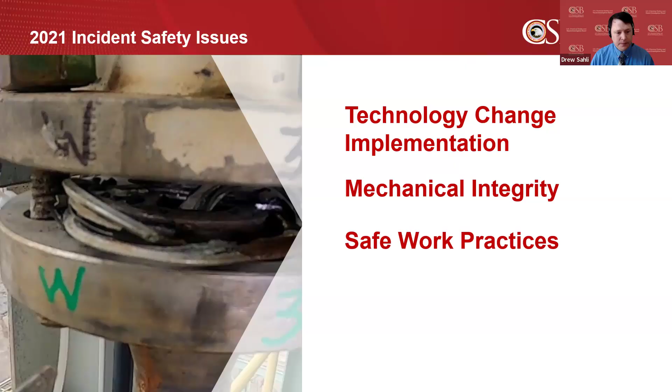The CSB identified 3 safety issues for this incident: technology change implementation, mechanical integrity, and safe work practices. The first issue is technology change implementation.

The 245 unit began operations in 2002. Within the first 5 years of the unit's operation, Honeywell documented corrosion failures to spiral wound gaskets in certain HF services within the unit. Honeywell identified a new gasket technology and conducted a management of change review. During the MOC process, Honeywell made the decision to replace the corroding gaskets by attrition. This was because the company believed that the existing gaskets were still acceptable for the service, despite the gaskets experiencing ongoing corrosion since the unit first began operating.

14 years later, in 2021, one of these spiral wound gaskets failed catastrophically and fatally injured a Honeywell operator.

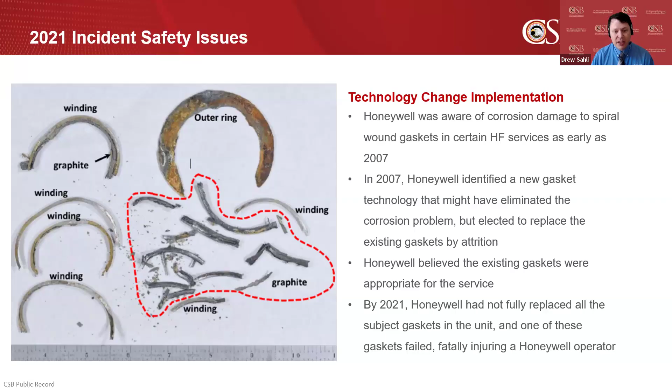The second issue is mechanical integrity. Honeywell had a mechanical integrity inspection program for the piping involved in the incident. And in the 36 days prior to the incident, Honeywell inspected the incident piping twice, once as part of this MI program and once as part of its leak detection and repair, or LDAR program. Neither inspection identified any problems with the incident piping.

Additionally, Honeywell did not use technologies that could have helped its inspectors and operators identify the leaking gasket prior to its catastrophic failure. These technologies include acid indicating paint and remote HF monitors. These technologies are either required or strongly suggested by industry guidance from the API and HF industry trade groups. Further, the use of these technologies is heavily recommended by Honeywell itself.

Honeywell operates a business unit in which it sells HF safety-related services and products. That business unit recommends to its customers to use acid indicating paint and HF monitoring. But despite Honeywell's own guidance to its customers, Honeywell was not using the technology in its own 245 unit.

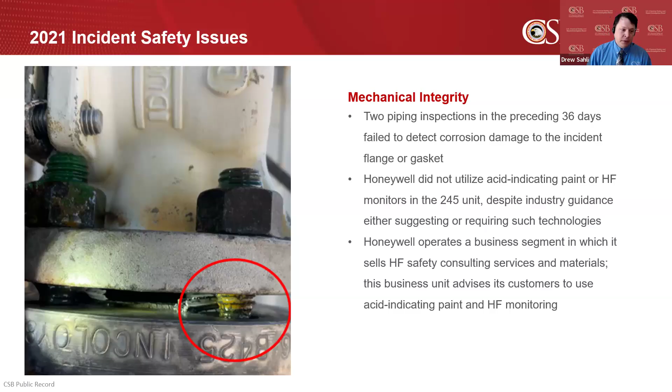The third safety issue for the 2021 incident is safe work practices. Honeywell attempted to start up equipment that was not ready for operation, and its startup attempt did not follow the company's written startup procedures. Because the startup procedures were not followed, the valve on the HF inlet to the vaporizer was left closed after a planned maintenance outage, but the valve was never reopened prior to the startup attempt. This caused the no-flow condition to the vaporizer, which in turn caused the presence of the two field operators in the vicinity of the leaking incident gasket.

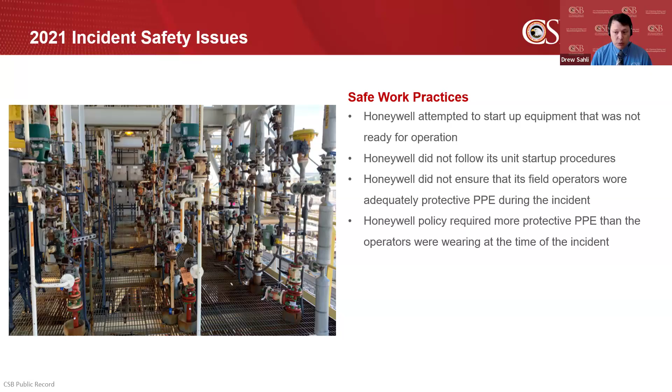Also, neither of the two field operators were wearing adequately protective PPE during the incident, resulting in one of the operators' fatal exposure to HF. Finally, during the emergency response, Honeywell's emergency response team wore PPE that was less protective than what was required by Honeywell emergency response procedures.

I'll now cover the second incident, the 2023 catastrophic reboiler explosion.

The second incident occurred on January 23, 2023. Honeywell was starting up the 245 unit after an unplanned outage. The startup proceeded normally until the reboiler suddenly and catastrophically exploded. The reboiler failed at normal operating conditions that were within the reboiler's as-designed temperature and pressure limits.

Over 800 pounds of anhydrous HF and over 1,600 pounds of chlorine were released during this incident, and the explosion met the definition of a BLEVE, or a boiling liquid expanding vapor explosion. Honeywell reported $4 million in property damage, and there were no injuries associated with the incident, very fortunately.

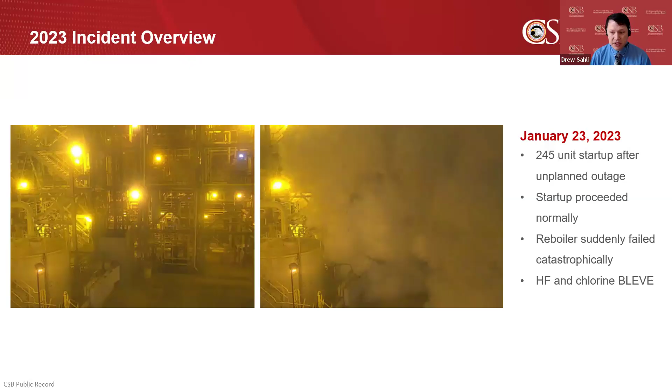The CSB identified 4 safety issues for this incident. Those are mechanical integrity, the management of organizational and personnel change, capital project management, and organizational resilience.

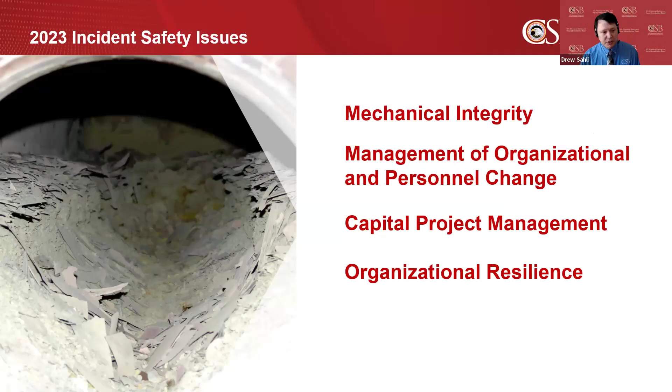First, I'll cover MI. Since the reboiler's original installation, Honeywell Geismar has run it to failure 4 times. The failures occurred in 2003, 2008, 2012, and 2023.

Honeywell had a pressure vessel inspection program and generally followed the guidance in API 510. Additionally, the reboiler's carbon steel shell corroded at rates that were consistent with published industry data, data which Honeywell was aware of. Despite this, Honeywell's mechanical integrity program was unable to prevent any of the 4 shell failures.

The incident shell was installed in 2012. Prior to the 2023 explosion, Honeywell last inspected the shell in October of 2021, about 15 months prior to the explosion. Honeywell detected that the shell was approaching its minimum thickness and initiated a capital project to replace the shell.

Management approved the project in February 2022, but the project was never completed, and Honeywell never purchased or installed a replacement shell prior to the explosion.

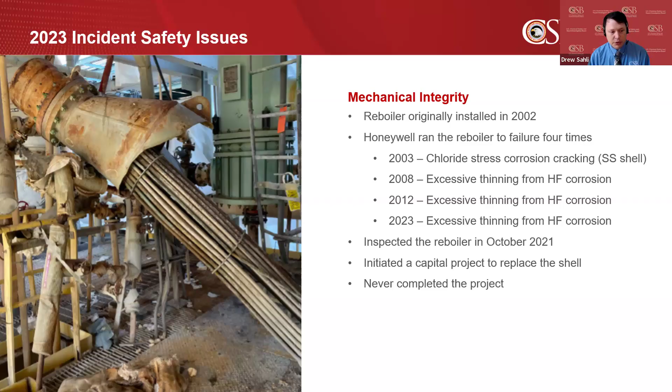The next safety issue is the management of organizational and personnel change. After the Geismar Site Reliability Organization inspected the reboiler in October 2021 and detected the shell thinning, the reliability team referred the reboiler to the 245 unit's maintenance engineer.

The maintenance engineer initiated a capital expenditure request or project in January 2022, and site management approved it in February 2022. Subsequently, in April of that year, the 245 unit maintenance engineer left the company for employment elsewhere.

The CSB determined during its investigation that this single engineer was the only employee at the Geismar site who had active current knowledge of the reboiler project when he departed the site.

Honeywell had an existing applicable management system for managing personnel change, but when the 245 unit maintenance engineer left the company, his manager never performed an MOOC analysis and never reassigned the reboiler project to another employee. As a result, the project went unmanaged and the reboiler ran to failure in January 2023.

Honeywell also did not apply its MOOC policy and procedure to several other significant changes at the site, including a large-scale reduction in force, ongoing vacancies to 2 key site management positions, and other personnel changes.

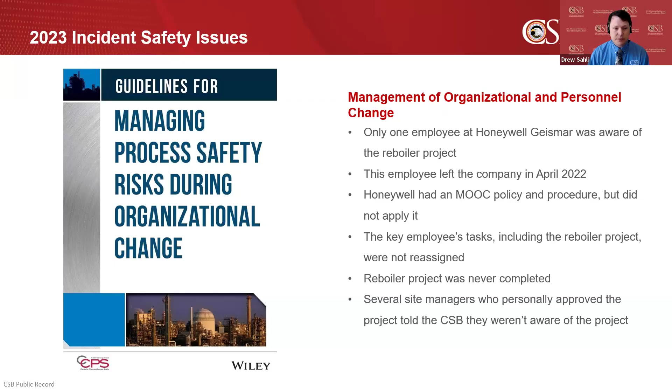The third safety issue for the second incident is Honeywell's management of capital projects. Honeywell had 2 primary ways that it handled capital projects. First, it prioritized projects according to their criticality and complexity.

Generally, less complex, less expensive projects, like the one to replace the reboiler shell, were supposed to be funded almost immediately after being approved by management. The reboiler project was approved by management in February of 22, but it ultimately never received funding.

From October 2021 to January of 2023, Honeywell approved 142 projects for capital funding. Of these 142, 78 were either unprioritized at all or were prioritized lower than the reboiler project. Despite this, Honeywell funded all 78 of these projects instead of the reboiler project.

As a result, the reboiler ultimately ran to failure. This indicates that Honeywell's capital project management system was operating outside of its procedural and policy requirements.

Finally, the last safety topic for the reboiler failure is organizational resilience. As a concept, organizational resilience is defined as an organization's ability to detect, cope, and adapt to changes and disruptions to normal operation. In October 2021, Honeywell Geismar experienced a fatality incident, which I described earlier.

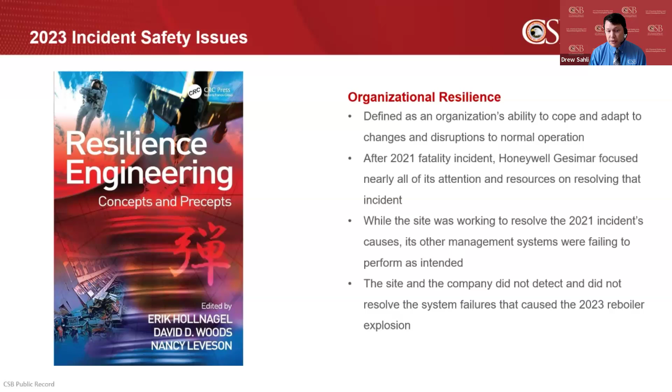That completes my review of the 2021 and 2023 incidents. Next, I'll pass the baton on to my teammate, Don Nixon. Thank you, Drew. I will talk about the third incident, common factors, and some recommendations. Next slide, please.

Leading up to the incident, the 245 unit was undergoing a planned maintenance outage. A few days before the incident, Honeywell prepared the D-reactor fresh feed station for maintenance, including locking out the piping segment.

On the morning of the incident, 2 Turner pipe fitters obtained permits from a Honeywell operator to conduct gasket change work. The 2 Turner workers and the Honeywell operator proceeded to the unit to review the job and conduct a line break.

The 2 Turner workers donned level B PPE, which included acid-resistant suits and supplied fresh air. The Honeywell operator wore level D PPE. At the Honeywell operator's direction, the Turner worker opened the fresh HF feed station piping in 4 locations to monitor the piping for any signs of residual HF.

The operator observed no HF and believed that the piping was sufficiently clear. He then closed out the line break permit, and the 2 Turner workers conducted the rest of the job under a safe work permit, which required only level D PPE.

As the 2 workers proceeded through the work, one of them loosened the blind flange on one of the 2 bleed valves. Neither the Turner workers nor the Honeywell operator were aware that the valve had not been cleared of HF prior to the work.

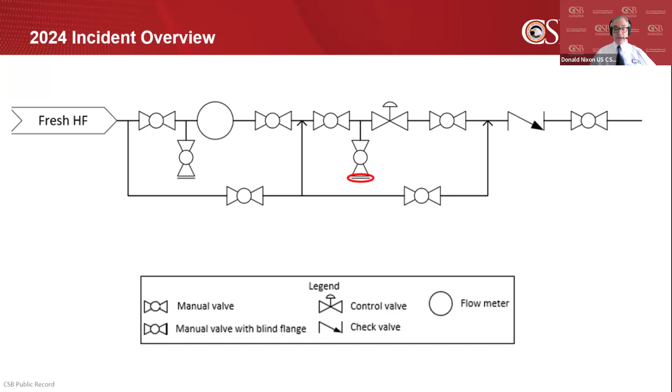The CSB identified one main safety issue: safe work practices. The blind flange connection from which the HF was released was not within the job scope. Yet, from a safety perspective, whether the flange was in or out of the job is not relevant, because the valve was within the bounds of the locked out piping and should have been cleared of hazardous energy.

Honeywell did not clear the valve during its preparation for maintenance. Further, immediately prior to and during the work, neither Honeywell nor the contract workers identified the hazard. Because the valve was in the closed position, there was no way for them to be sure that the valve had been cleared during maintenance preparation.

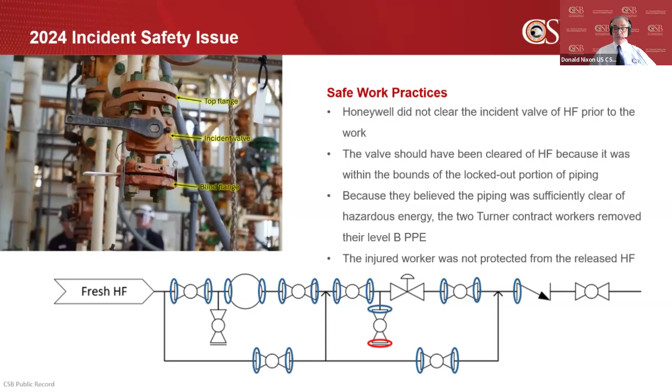After conducting initial line breaking activities in level B PPE, Honeywell and Turner closed out the line break permit, and the two Turner workers removed their level B PPE because they believed the piping segment was free of hazardous energy. Had the Turner workers been wearing sufficiently protective PPE, his injury would have been prevented.

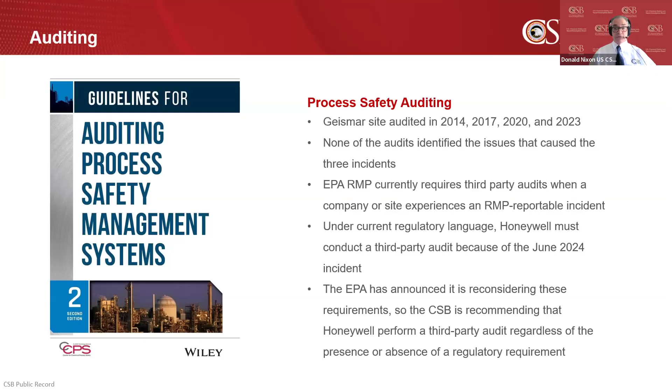In addition to auditing, the Toxic Substances Control Act, or TSCA, requires that the EPA evaluate and prioritize chemical substances for regulation under TSCA. HF is a highly toxic chemical that can produce a vapor cloud upon release. HF is one of the 8 most hazardous chemicals regulated by the RMP rule.

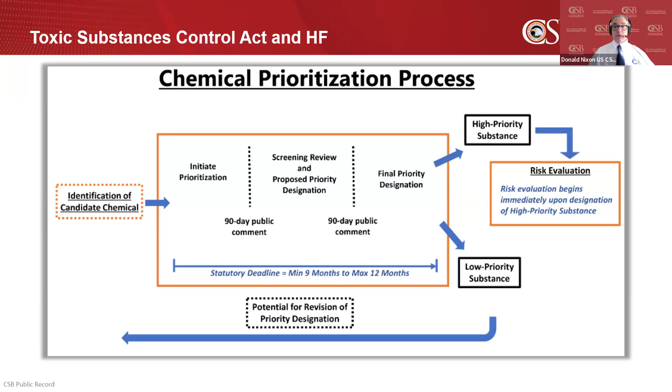As a result of its investigation, the CSB issued recommendations to Honeywell International, the EPA, and OSHA.

CSB's recommendations for Honeywell International include performing a third-party audit of the Geismar site's process safety and allied management systems. Honeywell should require periodic reporting updates from the Geismar site regarding the closure of the audit findings. Honeywell should also perform a safer technologies and alternatives analysis, also known as STAA, for the Honeywell Geismar HFC 245 FA unit. Honeywell should follow the language in the EPA's RMP rule promulgated in May of 2024.

For the US EPA, CSB recommends that EPA initiate its TSCA prioritization process for HF, and that EPA take appropriate subsequent actions depending on the results of the classification process.

For the Occupational Safety and Health Administration, the CSB reiterates a recommendation from the 2005 BP Texas City investigation. OSHA should amend the PSM standard to require the management of organizational and personnel change.

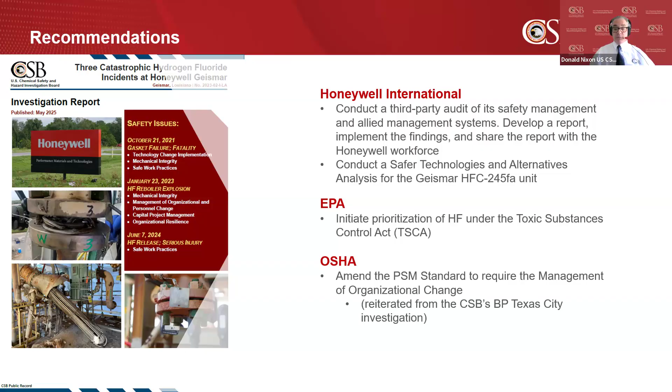This concludes the CSB's presentation of the Honeywell Geismar investigation report. Thank you. Executive Director Kleist, back to you.

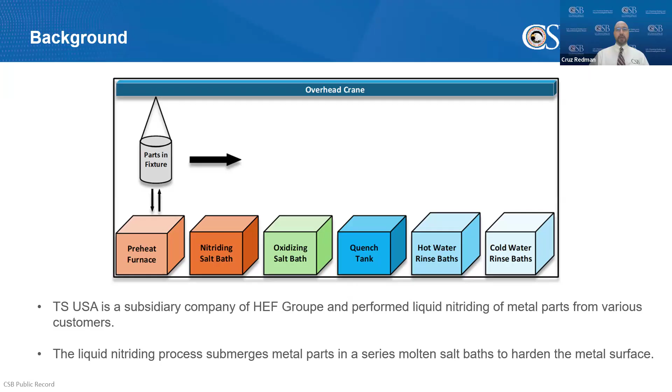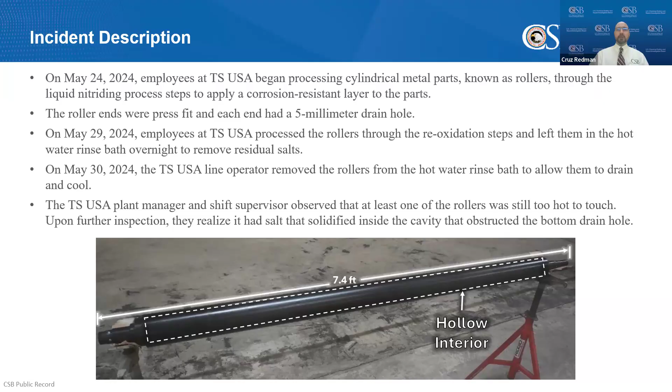By the evening of May 29th, the rollers were processed completely through the nitriding and reoxidation processes and were left in the hot water rinse bath overnight. On the morning of May 30th, the rollers were removed from the water bath to allow them to drain and cool. However, after 1 hour of cooling and draining, TS USA employees found that one of the rollers remained too hot to continuously touch. They also observed salt obstructing the bottom drain hole and believed that salt had solidified inside the roller cavity.

The TS USA employees contacted the process engineer, who worked remotely from the site, to develop a path forward to address the roller that was still too hot. A plan was developed to reintroduce these rollers to the oxidizer bath to melt the solidified salt plug. This plan was then communicated to the line operator.

At 8:51 a.m., the line operator moved the rollers with the overhead crane and partially submerged the rollers in the oxidizer bath. At 8:58 a.m., an explosion occurred and the oxidizing salt erupted from the molten salt bath, which you can see in the picture to the left. The released molten salt engulfed the line operator, causing thermal and chemical burns, which fatally injured him.

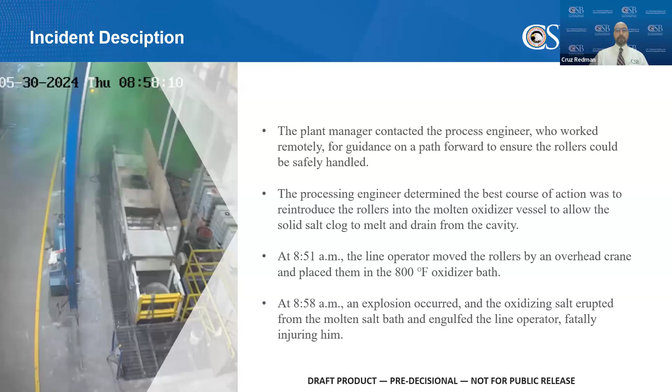The CSB determined that the cause of the incident was the introduction of water contained in the roller cavity to the 800-degree Fahrenheit oxidizing salt bath. The hot salt caused the water to expand and boil in the cavity of a roller, which resulted in an overpressure, steam explosion, and a molten salt eruption.

During the normal treatment process, the rollers were submerged in the oxidizer bath. When they were submerged, the molten salts enter the roller cavities. They were then raised to allow the salt to drain. However, the salt did not fully drain from one of the rollers and solidified at the bottom.

The rollers were then submerged in a hot water bath to rinse and dissolve residual salt. Due to the solidified plug of salt in the bottom of one of the rollers, the water that entered the cavity could not drain when the parts were removed from the water bath. This hot water in the cavity resulted in the roller being too hot to continuously touch when the TS USA employees were examining the parts on the morning of the incident.

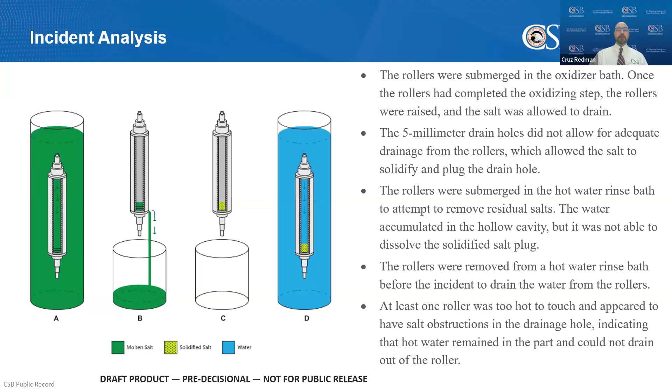Now I will hand it over to Owen to discuss and provide an overview of the safety issues and recommendations.

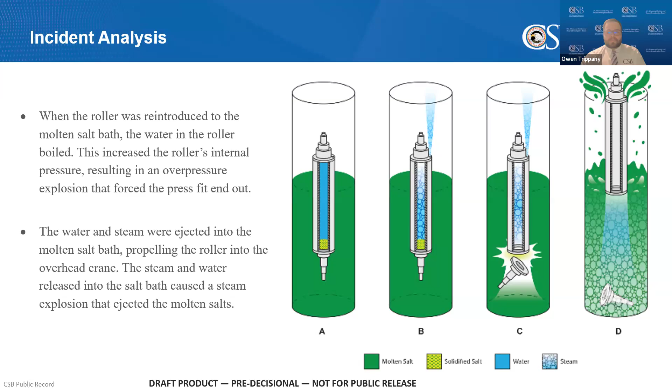Thank you, Cruz. The CSB identified three safety issues during its investigation into the explosion and molten salt eruption at TS USA: safety management systems, learning from past incidents, and corporate engagement.

The first issue identified was safety management systems. While TS USA had established a quality management system to ensure that parts met the appropriate quality standards, the company did not have an adequate process safety management system in place. As a result, there were insufficient programs at the Chattanooga facility to ensure the safety of the employees and equipment.

TS USA did not have procedures for reprocessing parts in the oxidizing bath, and the existing procedures for normal operation were inadequate. Additionally, TS USA did not train its employees on the hazards associated with the nitriding line. Finally, TS USA lacked hazard analyses for accepting and processing new parts, reprocessing parts, and the operation of the liquid nitriding line.

Due to the lack of an adequate safety management system, TS USA employees were unprotected from and unaware of the hazards presented by the nitriding line, the potential for part cavities to entrap materials, and reprocessing the rollers.

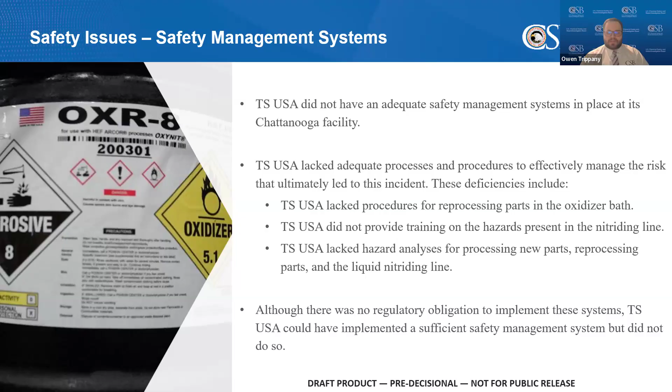The second safety issue identified during the investigation was learning from past incidents. Before the incident at Chattanooga in 2024, the CSB identified three other events that occurred due to the entrapment of materials and parts. The first explosion occurred in 2018 at an HEF facility in Mexico. Water was trapped in a part with an internal cavity. The water boiled and overpressured the part when it was submerged in the nitriding salt bath.

The second explosion occurred in 2020 at an HEF facility in France. A part with a welded seal cavity had trapped air. When the part was submerged in the nitriding salt bath, the air increased in pressure and overpressured the seal cavity, causing an explosion that ejected salt.

The last event occurred at the Chattanooga facility in 2023, less than one year before the 2024 incident. Nitriding salts were trapped in the cavity of a part and were carried over to the oxidizing bath. The salts reacted, causing the oxidizing salts to overflow from the molten salt bath.

TS USA and HEF Groupe did not adequately investigate these incidents, perform causal analysis, develop corrective actions, or generate formal investigation reports. Additionally, HEF Groupe did not ensure the events were communicated to other facilities within the organization.

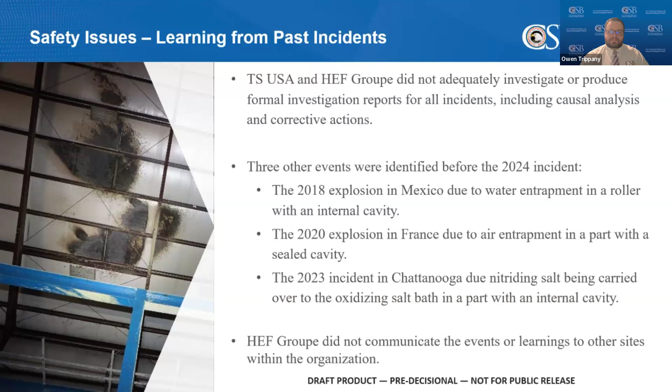The last safety issue identified during the investigation was corporate engagement, which has two components: knowledge management and corporate governance. While HEF Groupe developed safety information such as hazard analyses, it did not provide the knowledge to its subsidiary facilities. All of the safety information was centralized at the corporate level, and HEF relied on corporate meetings and safety letters to share the information throughout the company. It did not ensure that all of its employees had access to the information.

Additionally, while HEF Groupe did perform risk assessments on the liquid nitriding line, the findings were not communicated to its subsidiaries, and the assessments only existed in French.

As previously discussed, HEF Groupe also did not ensure that incidents and corrective actions were communicated to its other sites. HEF Groupe also had insufficient governance of their subsidiary facilities. It did not ensure that other sites were following the company's safety guidance, such as the risk assessments. Finally, HEF Groupe did not provide adequate resources, such as safety personnel, to ensure that safety guidelines were implemented and followed at all locations.

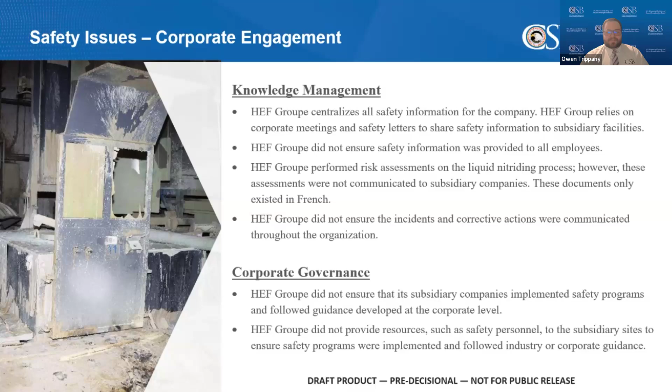The CSB made recommendations to two entities, TS USA and HEF Groupe. The CSB made three recommendations to TS USA.

First, the CSB recommended that TS USA implement physical protective barriers around the molten salt baths to isolate employees from hazardous releases at all of its liquid nitriding facilities.

Second, the CSB recommended that TS USA develop a safety management system that includes programs for hazard analyses, written operating procedures, training, and incident investigation. Lastly, the CSB recommended that TS USA establish a position at each of its facilities that is responsible for the new safety management system and ensuring that HEF guidelines, regulatory requirements, and industry safety guidelines were followed.

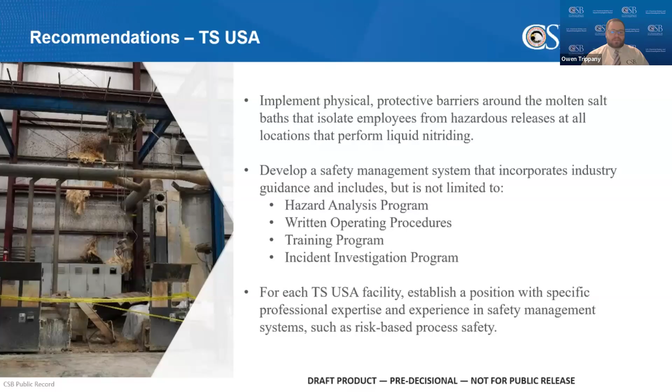The CSB made four recommendations to HEF Groupe. First, the CSB recommended that HEF Groupe implement physical protective barriers around the molten salt baths to isolate employees from hazardous releases as part of its design for liquid nitriding facilities.

Second, the CSB recommended that HEF Groupe develop a safety management system like the one the CSB recommended to TS USA. Third, the CSB recommended that HEF Groupe establish a comprehensive knowledge management program for sharing information through the HEF Groupe organization. This program shall include knowledge from audits, hazard analyses, and incident investigations, including causal analysis and corrective actions.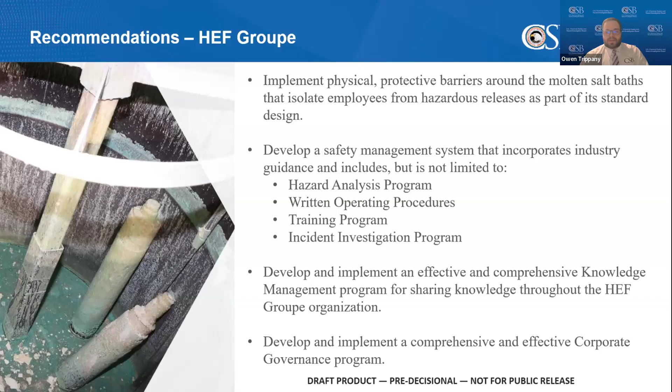Finally, the CSB recommended that HEF Groupe establish a corporate governance program. This program shall include regular audits of facilities with tracking and accountability for the implementation of all corrective actions identified by the audit. The audits shall also evaluate facility adherence to the recommended safety management system. The corporate governance program shall also require documentation of all audit findings, prompt response to deficiencies, development of corrective actions, and the implementation of the corrective actions throughout the organization.

This concludes the CSB's presentation on the TSUSA investigation. I will now turn it back over to Executive Director Klejst.

Well, thank you, Cruz and Owen, for that presentation. And while there were many investigators that supported both the Honeywell investigation and the TSUSA investigations, I thank you all for your contribution from deployment through report development through completion of the report.

I would like to recognize one person in particular this afternoon, Owen Trippany. This is Owen's first full investigation since he completed the agency's Pathways program as a chemical engineer. So I do want to recognize Owen for his superior work, along with all the individuals at the agency that mentored him through this process that gave us the result that we have today.

Congratulations to Owen. Our next presentation will be on the second investigation update that the agency published in connection with the biolab facility in Conyers, Georgia. The investigator in charge, Vonzella Vincent, will be making the presentation this afternoon. Vonzella, please proceed.

Thank you, Executive Director Klejst. Good afternoon. I am Vonzella Vincent, and I will be presenting an update to the biolab investigation on behalf of our team.

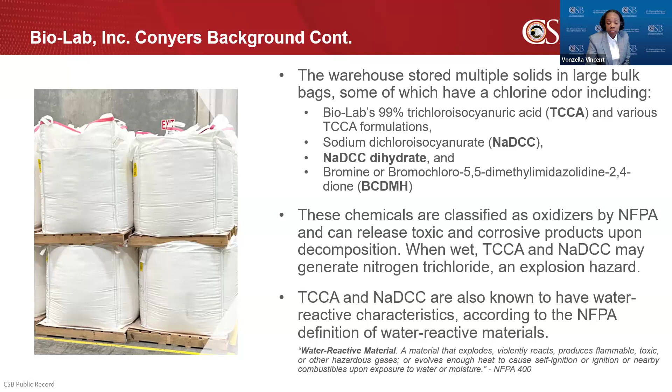When wet, TCCA and sodium dichloroisocyanurate may produce nitrogen trichloride, an explosion hazard. Additionally, they have water reactive characteristics according to the NFPA's definition of a water reactive material.

Biolab experienced frequent failures related to corroding components of the building's fire protection system safeguards. A firewall intended to prevent the spread of a fire divided the warehouse into two storage areas. The area behind the firewall was referred to as the bunker.

In 2019, a fire and risk consultant determined that the automatic early suppression fast response sprinkler system at a minimum design pressure of 52 pounds per square inch was adequate for Biolab's plan to store large nylon flexible bags containing the Class 1 oxidizer TCCA stacked two high inside the bunker using floor storage.

In 2021, after the warehouse had been built and used for storing chemicals, Biolab added rack storage. In 2024, according to the inventory documentation provided, nearly 2.9 million pounds of TCCA and sodium dichloroisocyanurate, both in anhydrous and dihydrate form, were stored outside the bunker near the firewall and along other dry chemicals within the rack storage system.

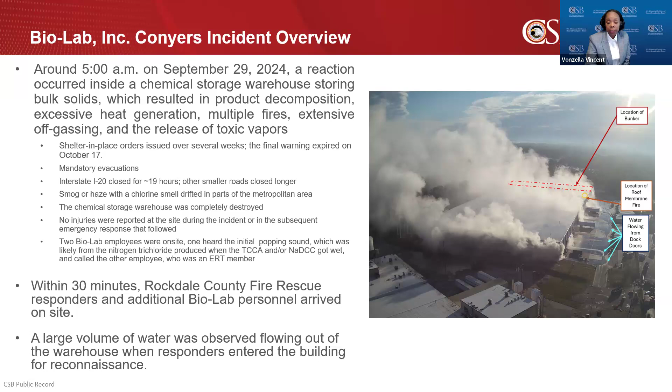At approximately 6:30 a.m., flames were visible on the roof above the area where the reaction and off-gassing were initially observed. The first small fire, which was a roof membrane fire, was extinguished around 8:10 a.m. At approximately 9:40 a.m., witnesses observed a large volume of water still flowing from the building.

Around noon, a second larger fire erupted, which produced thick black smoke, followed by multicolored plumes of smoke. The roof and most of the walls had collapsed by 8:00 p.m., trapping some chemicals underneath. Excavation equipment was used to allow emergency response personnel access to extinguish fire hotspots and reacting product.

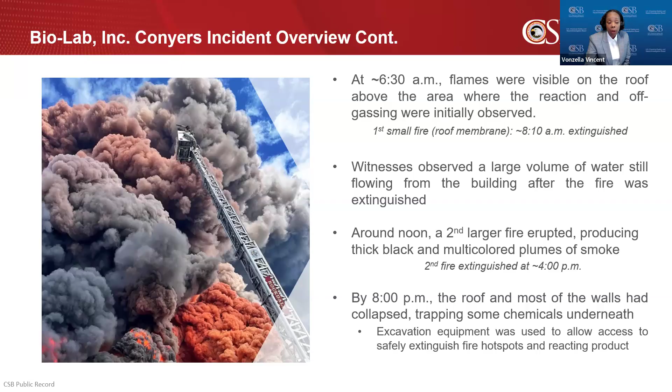Post-incident, a controlled demolition of the warehouse under a unified command was established to remove the remaining chemicals and structural components. Biolab managed the collection, sampling, and disposal of surface water runoff at the site during cleanup and remediation activities. In May 2025, Biolab announced it had completed remediation of the site affected by the incident.

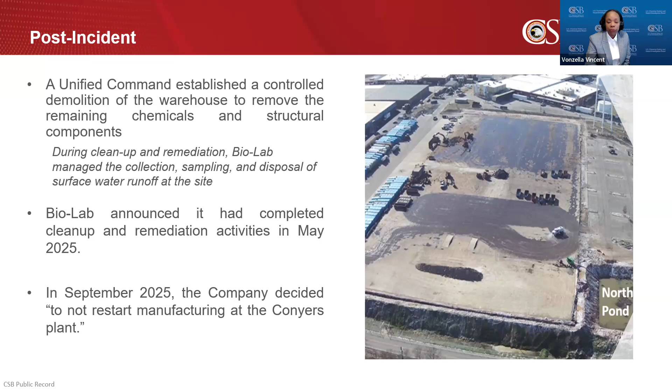In September 2025, Biolab decided to not restart manufacturing at the Conyers plant.

Path forward for the CSB team. The investigation team is continuing to gather facts and analyze key areas of the biolab incident, including testing some of the chemicals stored in the warehouse at the time of the incident to quantify their water reactivity characteristics, information and evidence to help determine the most likely water source that initiated the chemical reaction in the morning, storage and handling of oxidizers and their compatibility, which also have water reactive characteristics, and regulatory and industry guidance on storage and handling of reactive materials, including fire protection systems.

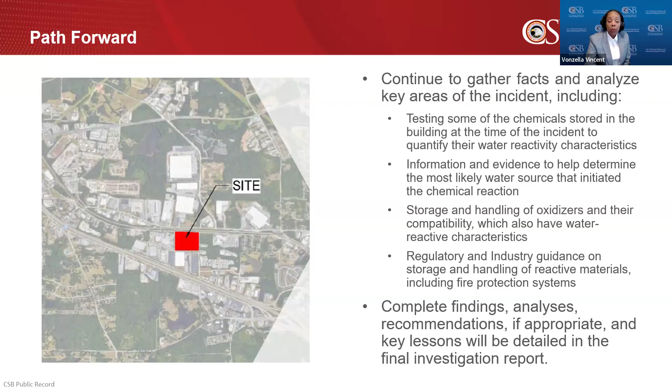Complete findings, analyses, recommendations, if appropriate, and key lessons will be detailed in the final investigation report. This concludes the update of the biolab investigation. I now turn the presentation back to Executive Director Klejst.

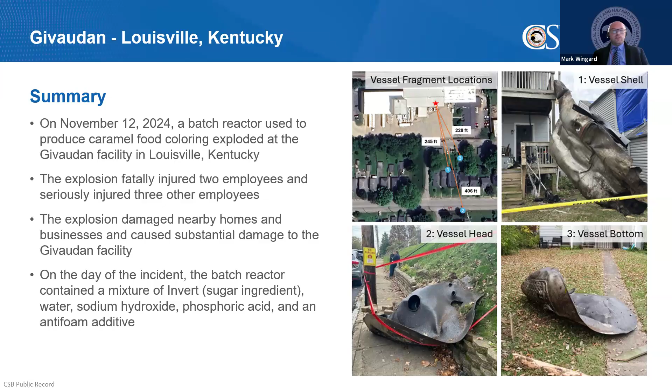Uncontrolled runaway reactions have led to many catastrophic explosions. The Givaudan incident exhibited similarities to other runaway reaction disasters that the CSB has investigated. This event involved the use of a batch production process. The reactor experienced a rapid and uncontrolled rise in temperature and pressure, culminating in an explosion that caused great harm.

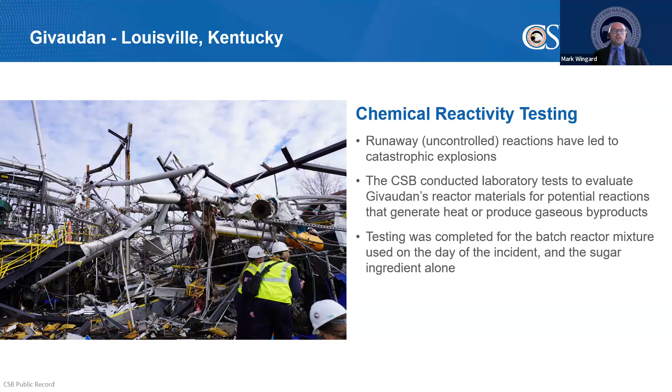The CSB conducted laboratory reactivity tests to determine whether the materials in the batch reactor could produce such a runaway reaction. These tests evaluated Givaudan's reactor materials for potential reactions that generate heat or produce gaseous byproducts. Testing was completed for the batch reactor mixture used on the day of the incident, as well as for the sugar ingredient alone.

The testing determined that the batch reactor materials behaved similarly to the sugar ingredient. The tests found that the materials decomposed with self-heating that started within the reactor's normal operating limits. The reaction produced carbon dioxide, a non-condensable gas. These graphs provided show that the decompositions generated high temperatures and pressures.

Overall, the testing showed that Givaudan's reactor materials can undergo a runaway reaction, which is capable of causing an explosion similar to the one on the day of the incident.

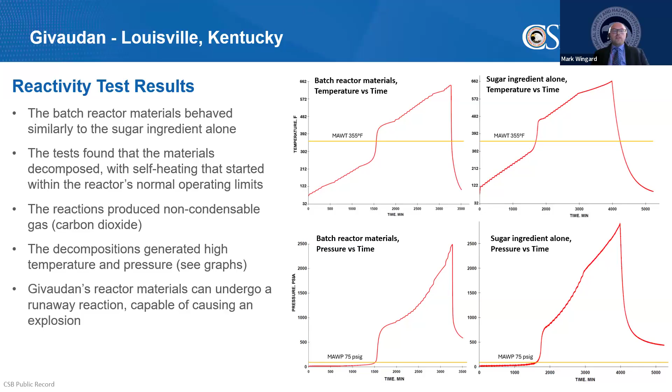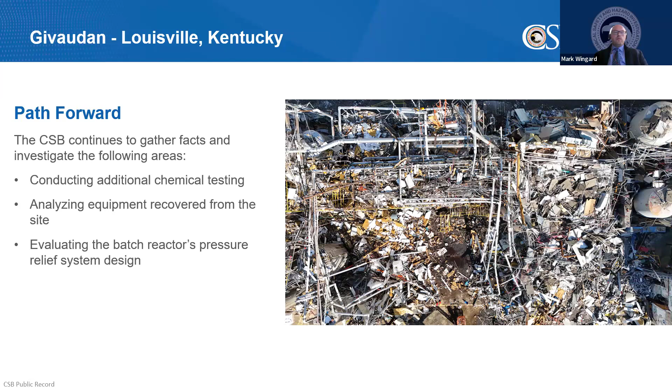The CSB investigation is ongoing, and the CSB is continuing to gather facts and analyze several key areas, including conducting additional chemical testing, analyzing equipment recovered from the site, and evaluating the batch reactor's pressure relief system design.

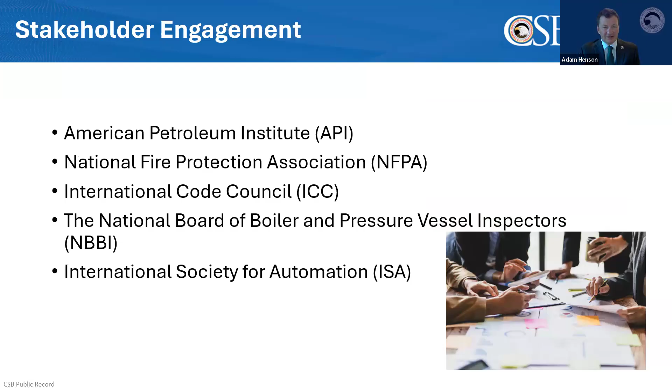So as Chuck said, we have to go out, we have to engage with our stakeholders. Today I'm happy to be here to talk to you about some of those engagement activities with some of our larger stakeholders, the standards development organizations listed on the screen there.

The American Petroleum Institute is by and away the largest stakeholder that we have, based solely on the number of recommendations that they've received. They've received more recommendations than anyone else, and that is partly due to the fact that the subject matters they covered are so inextricably linked to what it is that we do, and also because of the industry's recognition of them as a developer of codes and safety standards.

Recently, we have attended the API's fall and spring refinery equipment and standards meetings, during which time we have engaged with their subcommittees on inspection and mechanical integrity, above ground storage tanks, instrumentation and control systems, heat transfer equipment, and not to forget anybody, we have also engaged with their... Actually, that was everybody. Thank you.

We've had a lot of success working with API in the last several years, having closed 12 recommendations. Based off the activities we've done recently, we've advanced 3 of the recommendations to a status of open acceptable response. We hope to work cooperatively with them in the future to close the remaining recommendations, of which there are about 15. Another opportunity granted to us for stakeholder engagement by the API was they allowed us to give presentations at their Operating Practices Symposium during both events, which is co-sponsored by the American Fuel and Petrochemical Manufacturers.

During the one in fall, we discussed the lessons learned from BP Husky, Oregon, and during the one in springtime, Malika Yerzi discussed the lessons learned from Marathon Petroleum in California. We truly appreciate the opportunities that they've afforded us to meet with industry.

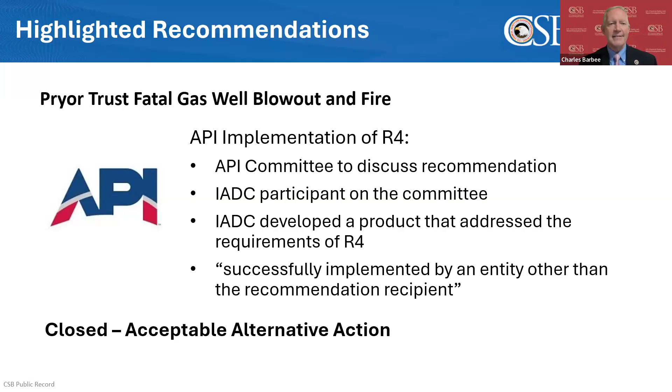Next slide, please. So now we're going to talk about the recommendation that was issued to IADC. We asked for them to just participate in the development of the RP. And in this case, like I say, they actually came out and implemented the requirements of the recommendation.

Based on the fact that they far exceeded the participation requirement of that recommendation, they get one of our most esteemed statuses, which is closed exceeded recommended action. We immediately proposed that to the board. They concurred, and that is what they did. They closed this recommendation, exceeded recommended action.

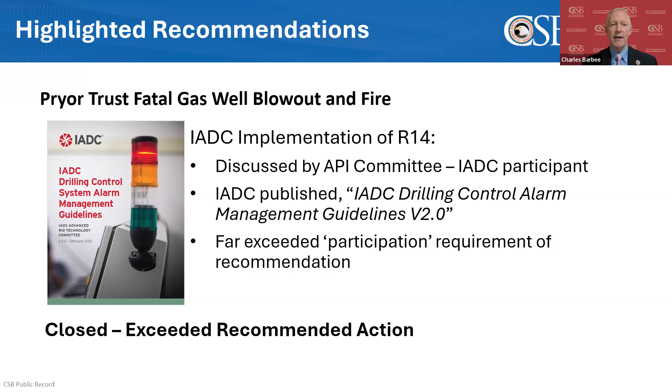So in this case, we get to say fantastic job, API, as this is a group in the committee, and absolutely amazing and fantastic job to IADC in a product that addressed our recommendation. Next slide. Okay, now we're going to talk about the Husky Superior explosion and fire.

On the morning of April 26, 2018, the primary and sponge absorber of the Husky Energy Superior refinery exploded during a planned shutdown of the facility's fluidized catalytic cracking unit, or FCC unit. Debris from the explosion struck an asphalt storage tank approximately 200 feet away. Asphalt leaked from the damaged tank and over the containment wall, spreading into the FCC and crude unit operating areas before eventually catching fire.

Husky Superior Refinery reported that 39,000 pounds of flammable hydrocarbon vapor mixture, as well as approximately 17,000 barrels of asphalt, were released during the incident. 36 refinery and contract workers received medical treatment as a result of the incident, and it was reported that the explosion shook buildings up to a mile away.

The plume from the burning asphalt was visible from neighboring communities, and an evacuation order was issued by county officials to protect the public from the smoke plume and as a precaution for fear that the incident would escalate. As a result of the incident, the facility was completely destroyed, and the incident resulted in $550 million of on-site and $110,000 of off-site property damage.

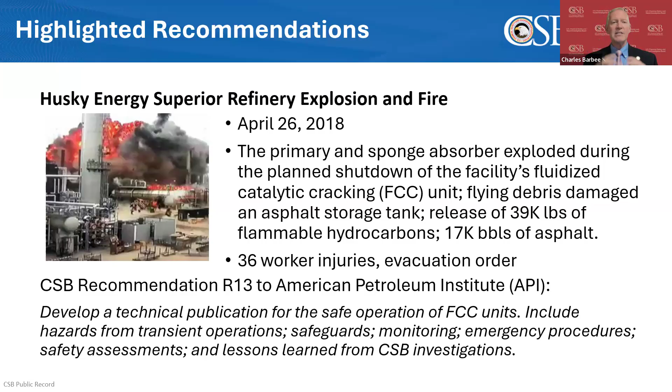to incorporate the lessons learned from this investigation, as well as the CSB's ExxonMobil Torrance Refinery electrostatic precipitator explosion investigation. And we wanted those references in the document's bibliography. So we asked for a lot of things.

As far as implementation, API formed their committee. They wanted to discuss the recommendation. Several of the members in API are also in the American Fuel and Petrochemical Manufacturers Trade Association, AFPM. What you'll find is sometimes these groups come and talk to us, and sometimes they just handle this amongst themselves. Like the Pryor Trust, they just sort of did what they were going to do.

In this particular case, the AFPM came to us and gave us a presentation on what their intentions were. And what they did is they developed publicly available information and put on several regional workshops addressing the requirements of R13. And there's a lot of requirements there for the safe operation of FCC units.

Again, Adam Henson, who just presented, went out and attended one of those regional workshops and basically verified that everything in that recommendation, or all the requirements of that recommendation, were in fact addressed by AFPM, in this case on behalf of API. Again, because the closed acceptable alternative action status can be done when the recommendation is successfully implemented by an entity other than the recommendation recipient, we proposed to the board that they close this recommendation, acceptable alternative action. They concurred, and that is what they did.

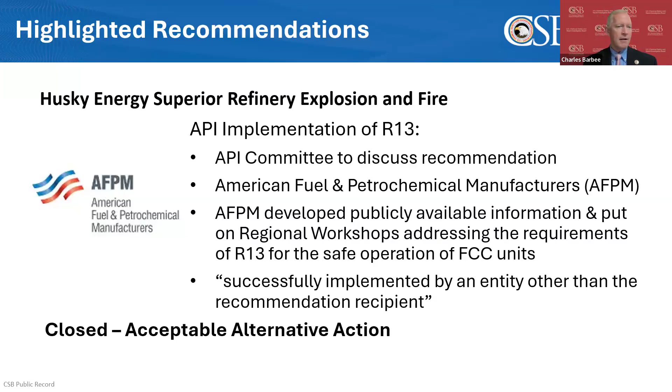So why did we talk about this? Stakeholder engagement. Stakeholder engagement in our advocacy program is the secret formula, I'll say, to implementation of recommendations. In this particular case, Adam addressed API, NFPA, ICC, NBBI, and ISA.

API, since we've been an agency, we've issued them 56 recommendations. The first one was way back when we were first created, back in September of 2000. For NFPA, we've issued 22, ICC has been issued 10, NBBI has been issued 3, and ISA, our newest recipient of recommendations as far as a standard developing organization goes, we've issued them 1. We say welcome to the team of our partnership in safety. So welcome to the team, ISA.

But if you look, API, a little over 5% of the recommendations we've issued have been to API. They are our primary stakeholder partner in chemical safety. Right now, there's 16 of those 56 open.

NFPA, we issued them 22. They have 2 that are left open. ICC, we've issued them 10. They've got 3 that are open. NBBI, we've issued them 3 in the lifetime of our agency. There's 1 open. And ISA, again, we've issued them 1. There's 1 open.

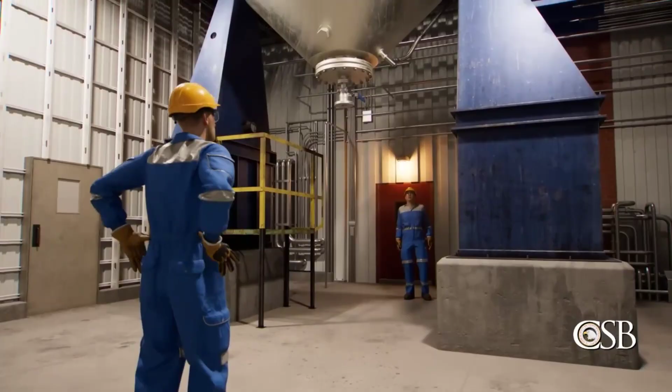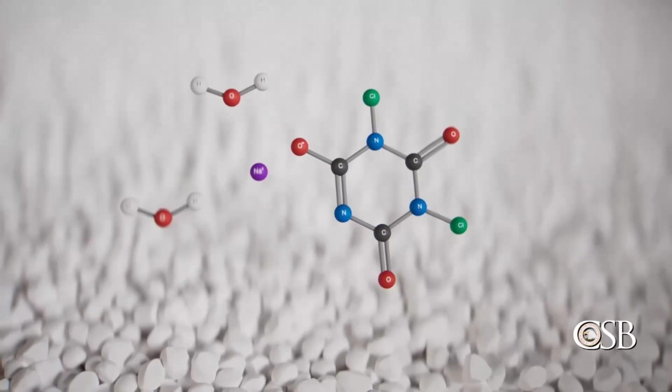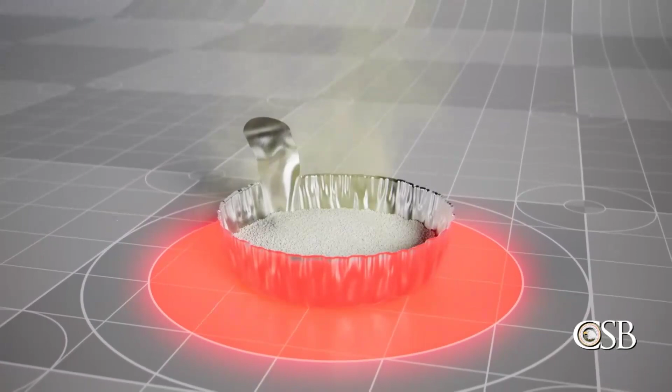Optima Belle is a toll manufacturer, a company contracted to provide chemical processing services, typically using its own equipment. On the day of the incident, Optima Belle was working on behalf of Clearon Corporation to conduct a batch tolling operation involving dehydrating a chemical called CDB-56. CDB56 is a white powder used as a source of chlorine for cleaning and sanitizing products. When exposed to high heat, it can decompose and release chlorine and other toxic substances.

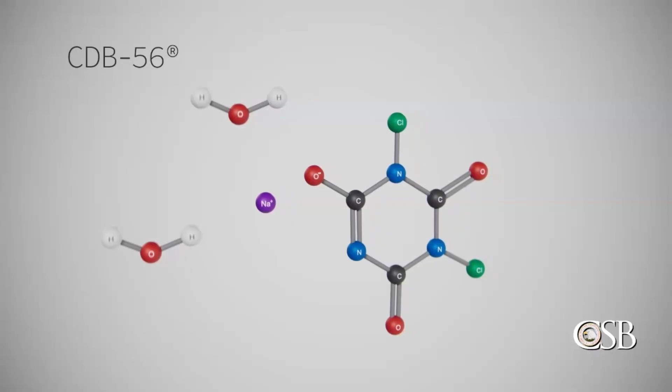The batch operation was intended to dehydrate CDB56 to transform it into a different compound that Clearon calls CDB63. CDB63 is a white granular material used for water chlorination in swimming pools, as well as in detergents and bleaching agents. Like CDB56, it can also decompose and release toxic chlorine when heated.

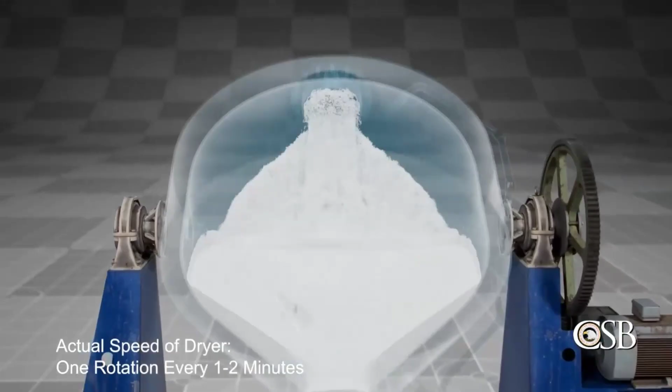For the batch dehydration process, Optima Belle planned to use a type of pressure vessel called a rotary double cone dryer. Clearon, however, had never before used this particular kind of dryer for dehydrating CDB56. Therefore, Optima Belle developed a new procedure for the dehydration operation. Their plan was to heat the compound by applying steam to the jacket of the rotary double cone dryer, while the dryer rotated to tumble the contents inside. Equipment would be used to create vacuum conditions in the dryer to help remove any gases produced, such as water vapor. Optima Belle, however, did not realize that heating CDB56 inside the dryer could cause the compound to decompose.

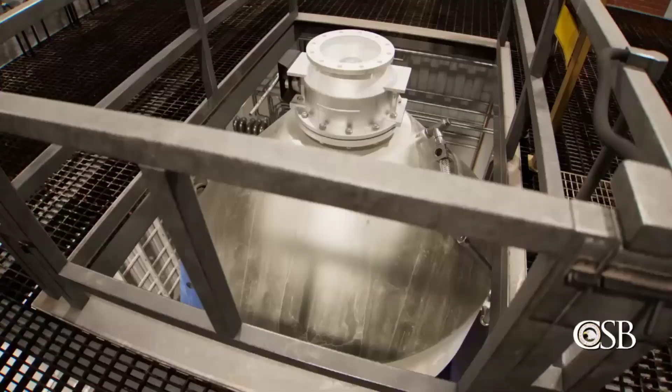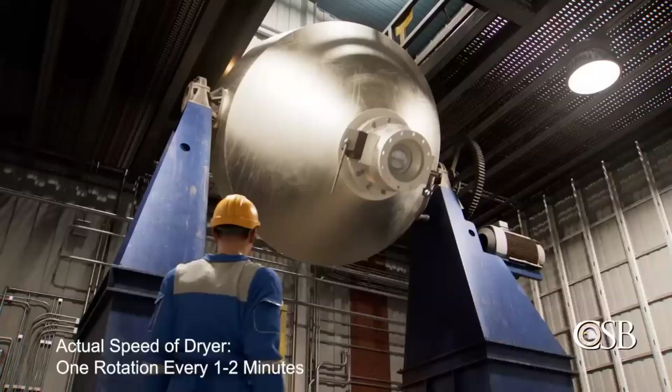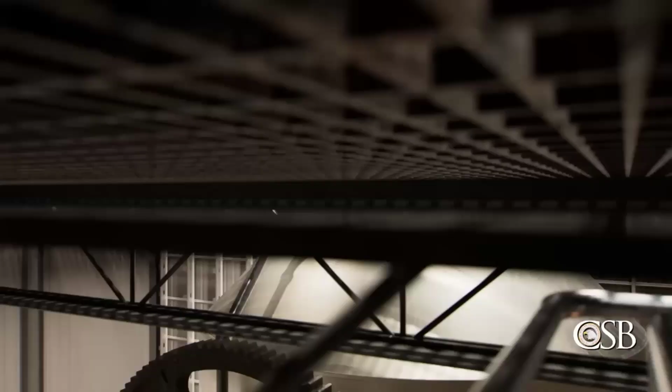On the morning of December 8, 2020, Optima Belle employees started the first of 4 planned batch operations to dehydrate the CDB56. They applied heat to the dryer, and workers from both Optima Belle and Clearon monitored the progress. But by late afternoon, workers observed some operational problems and stopped the dryer to troubleshoot. About an hour later, they restarted the dryer's rotation, and steam was reintroduced to the dryer's jacket.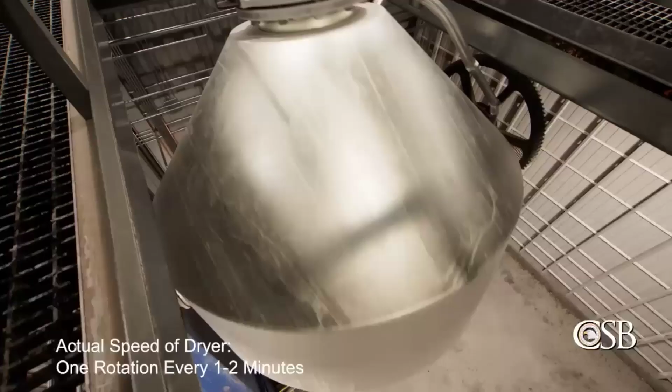But problems persisted. A sample of material taken from the dryer around 7:30 p.m. showed that moisture levels of the compound were not decreasing as expected, and now the white material contained dark specks. After Optima Belle texted Clearon about the issue, workers stopped the flow of steam to the dryer's jacket and stopped the rotation of the dryer to investigate the cause. Both Optima Belle and Clearon workers suspected that the dark specks could have been due to corrosion of 2 stainless steel valves on the dryer, which was otherwise constructed of a corrosion-resistant material.

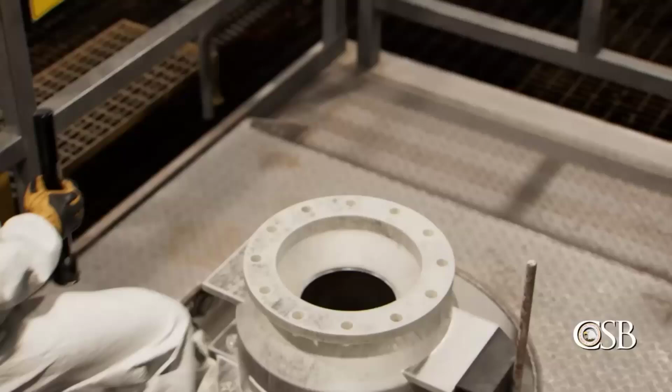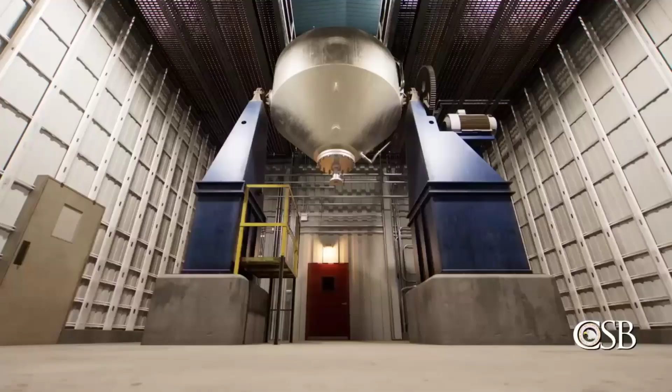Later, an Optima Belle employee told the CSB that when looking inside the dryer to investigate the suspected corrosion, the compound inside appeared lumpy with a yellowish tint and smelled like chlorine. While the workers were troubleshooting, the internal temperature of the dryer continued slowly increasing, even though no steam was flowing into the dryer's jacket. That is because, unknown to the workers, the earlier heating of the dryer had likely caused the compound inside to start decomposing, and a dangerous runaway chemical reaction was now underway.

Workers continued troubleshooting, and by 9:30 p.m., Optima Belle and Clearon agreed to stop the batch operation for the night and continue to investigate the cause of the black specks the following day. But at approximately 9:40 p.m., the decomposition reaction underway in the dryer increased rapidly, causing the temperature and pressure inside the dryer to spike. Within minutes, the dryer catastrophically exploded.

Metal debris from the explosion struck a nearby methanol pipe, causing it to rupture. The released methanol ignited, and a fire broke out. Other metal fragments from the dryer were found up to a half-mile from the site.

One Optima Belle employee was killed. Two others were evaluated for respiratory irritation, and one member of the public reported an injury related to the explosion.

The CSB launched an investigation and found five safety issues contributed to the severity of the incident: process knowledge management, thermal hazard assessment, equipment selection and design, tolling of hazardous materials, and regulatory coverage of reactive hazards. The first safety issue is process knowledge management.

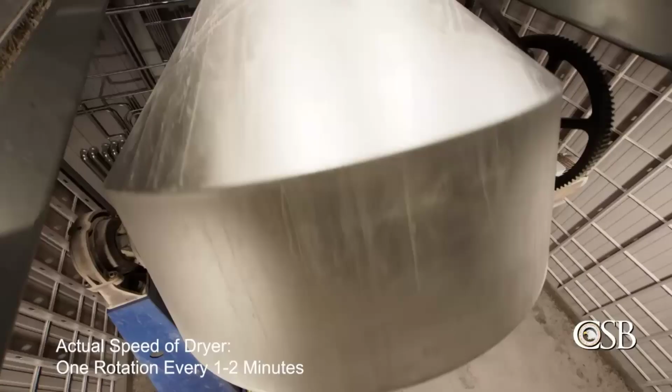But the CSB found that Clearon's technology package was inadequate and lacked critical known information on the decomposition of CDB56. For example, Clearon's own safety data sheet for CDB56, which was included in the package, listed its decomposition temperature as between 240 and 250 degrees Celsius.

But the CSB found that in the 1970s and 80s, a Clearon predecessor had conducted testing that showed CDB56 could decompose at much lower temperatures. These findings were documented in a report that Clearon had in its possession, but did not provide to Optima Belle as part of the technology package.

Post-incident testing of the material confirmed that CDB56 could begin a runaway decomposition at just 81 degrees Celsius. Because Optima Belle was not provided this crucial information, the company believed the dryer temperatures would be low enough to avoid a runaway decomposition reaction by design.

Accurate process and product knowledge is essential for the safe operation of chemical processes. There can be little expectation of safety if the companies operating a process don't fully understand the chemicals and their associated hazards. Our investigation found that Optima Belle lacked crucial information on the decomposition of CDB56.

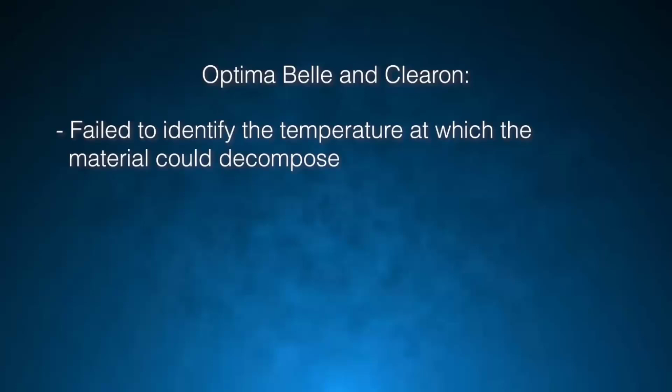Both companies failed to conduct adequate literature searches for public or internal safety data, and failed to use readily available reactive hazard screening methods to assess the reactivity of the material.

Had Clearon or Optima Belle performed a thorough thermal hazard assessment, the parties could have understood the hazards of the dehydration operation, and the explosion could have been prevented.

There are many publicly available tools that companies can use to screen new or existing chemicals for reactivity hazards. Some of them are simple screening tools that can be used to quickly determine if further research is required. Others, like differential scanning or accelerating rate calorimetry, provide detailed quantitative lab results that can be used to design a safe process. Using these thermal and reactive hazard assessment tools and developing processes accordingly can prevent tragic accidents like the Optima Belle explosion.

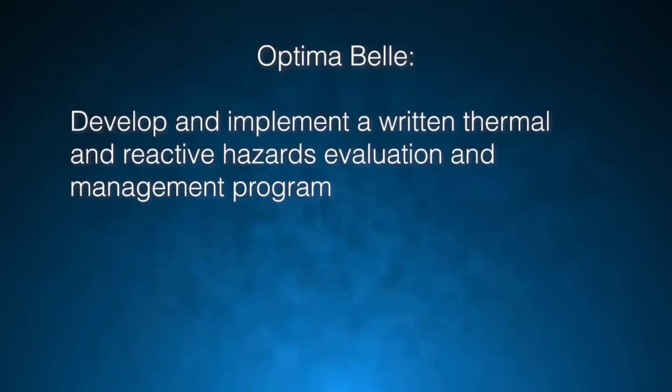In its report, the CSB recommended that Optima Belle develop and implement a written thermal and reactive hazards evaluation and management program.

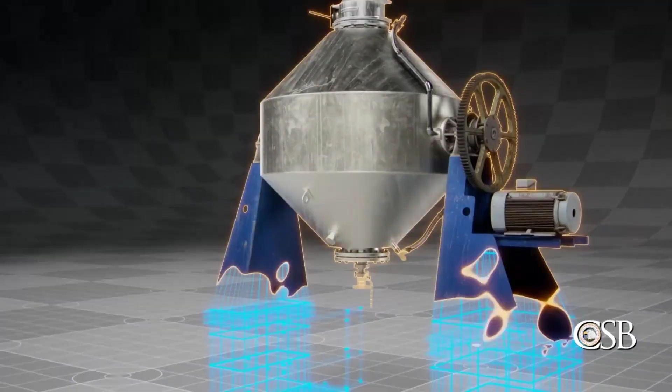The third safety issue that contributed to the incident at Optima Belle is equipment selection and process design. Optima Belle used existing production equipment for the batch tolling operation, but the CSB learned the equipment was not designed, sized, or re-engineered for the process.

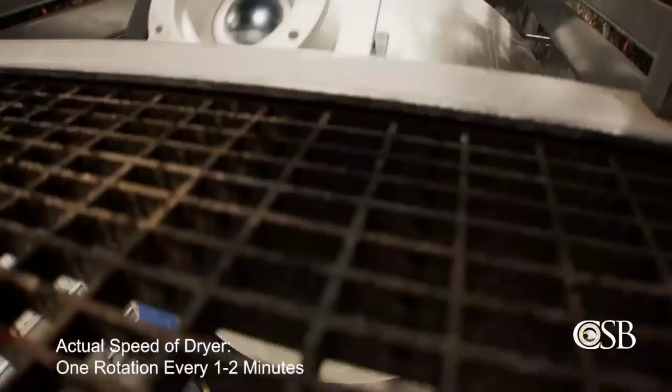As a result, the dryer was unable to quickly cool the contents if they became overheated, nor was it able to relieve the pressure generated during a decomposition. On the day of the incident, Clearon and Optima Belle essentially conducted an experiment on a new method to dehydrate CDB-56 at full production scale.

This was done without first experimenting at a laboratory or on a smaller scale, which could have alerted the company of hazards and led to changes in the process. Instead, the end result of this decision was a catastrophic explosion.

We found that Optima Belle's pressure relief system for the dryer was not designed or evaluated to relieve the pressure produced by the decomposition of CDB-56. When using existing equipment for a new process, companies need to ensure that the equipment design is appropriate for the proposed new process. Had pilot or lab scale studies been conducted, Optima Belle and Clearon likely would have gained additional data on CDB-56 and improved process knowledge. This might have led to changes in the equipment or process design, potentially preventing the explosion.

The fourth safety issue found by the CSB is the tolling of hazardous materials. Companies often augment in-house production by outsourcing chemical processes and other operations. These agreements are called tolling contracts. Clearon established a tolling contract with Richman Chemical, a tolling broker, who in turn contracted with Optima Belle. The Center for Chemical Process Safety, an industry organization, provides guidance for safe and effective tolling arrangements. But the CSB found that neither Clearon nor Optima Belle adequately followed that guidance.

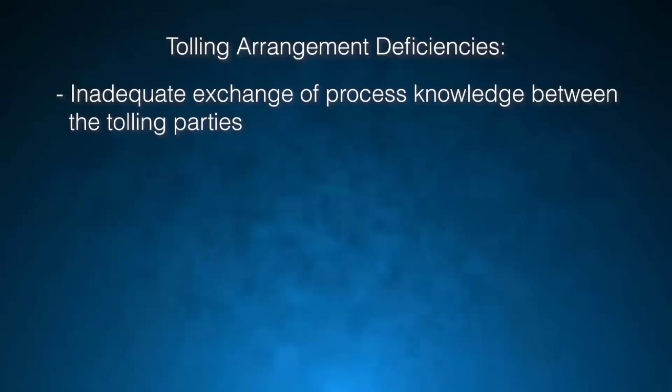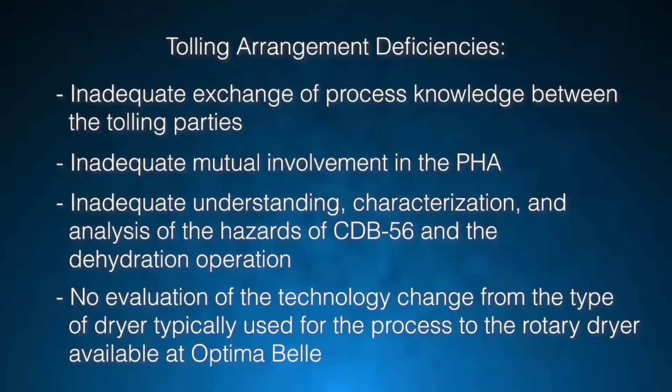Their deficiencies included inadequate exchange of process knowledge between the tolling parties, inadequate mutual involvement in the process hazard analysis, inadequate understanding, characterization, and analysis of the hazards of CDB-56 and the dehydration operation, and no evaluation of the technology change from the type of dryer typically used for the process to the rotary dryer available at Optima Belle.

Outsourcing the production of a hazardous material does not outsource the responsibility for process safety. Effective process safety and the prevention of a catastrophic incident are responsibilities that should be shared by all parties involved in a tolling operation. As a result, the CSB recommended that both Optima Belle and Clearon develop and implement a written program for tolling process design and equipment selection using available industry guidance.

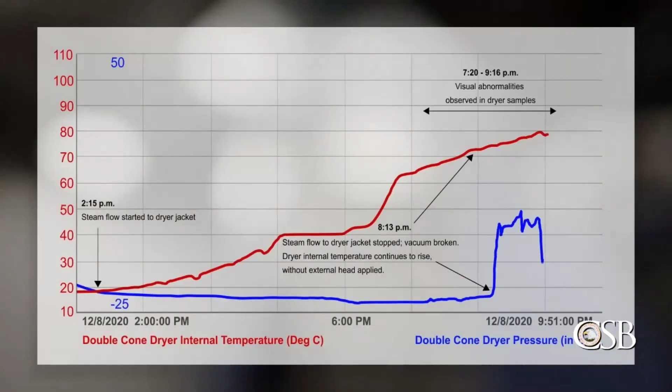Finally, the fifth safety issue that contributed to the incident at Optima Belle is regulatory coverage of reactive hazards. CDB-56 is a reactive chemical that can undergo a self-accelerating decomposition when heated. At Optima Belle, the decomposition led to a catastrophic explosion, fire, toxic emissions, and the death of an employee.

Yet this chemical, and many such reactive chemicals, are not regulated under OSHA's Process Safety Management Standard or the EPA's Risk Management Program rule. Had CDB-56 been covered under those regulations, Optima Belle would have been required to implement risk mitigation and management systems that could have prevented this incident. The CSB has a long history of investigating reactive chemical incidents, including producing a 2002 study in which the CSB called on OSHA and the EPA to expand their standards to address reactive chemicals and their hazards.

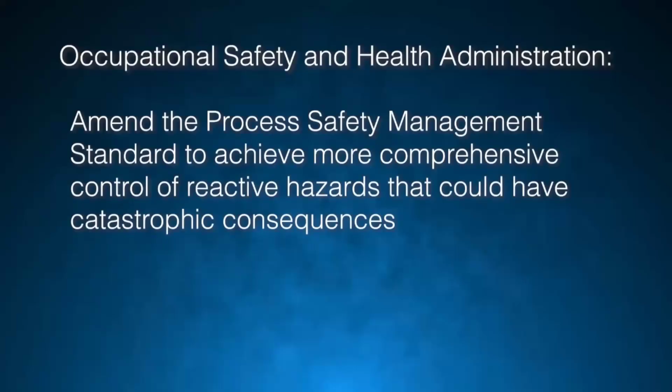To date, however, neither agency has acted on our recommendations. Therefore, in its final report, the CSB reissued its 2002 recommendation to OSHA to amend the Process Safety Management Standard to achieve more comprehensive control of reactive hazards that could have catastrophic consequences. And the agency reiterated its 2002 recommendation to the EPA to revise the accidental release prevention requirements to explicitly cover catastrophic reactive hazards that have the potential to seriously impact the public, including those resulting from self-reactive chemicals and combinations of chemicals and process-specific conditions.

The CSB believes OSHA and the EPA must strengthen their regulations on reactive chemicals. Regulations addressing reactive hazards will help keep similar incidents from occurring, prevent injuries, deaths, and protect those who live in nearby communities. The time is now for those agencies to act.